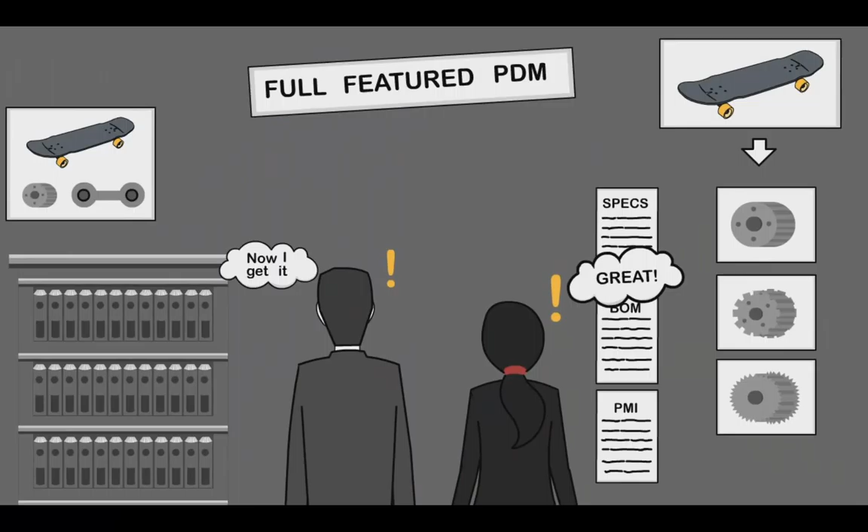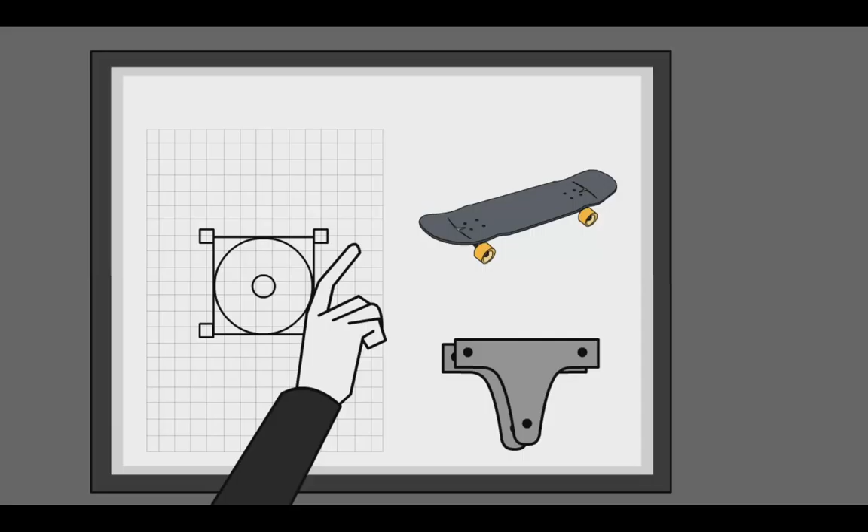PLM is very good at managing data and processes, but it's just out of reach for a lot of manufacturers, at least as a first step to get data under control. Let's take another look at full-featured PDM. PDM helps companies keep revisions and configurations under control and prevents overwriting files.

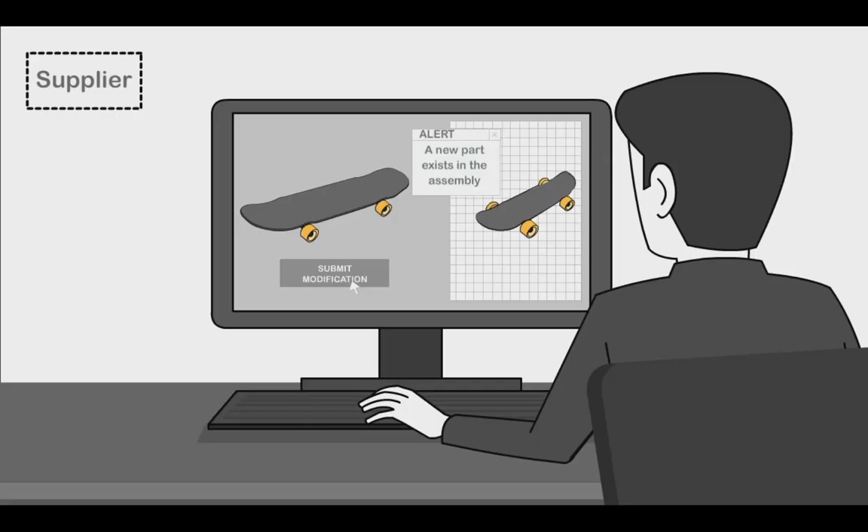It helps engineers work better, even if they're in different locations. And it helps designers coordinate activities across departments and the supply chain, even if they use different CAD tools. Full-featured PDM provides the capabilities manufacturers need to control, access, and share product data in a way that's accessible to smaller companies. And PDM provides a valuable foundation that opens the door to more advanced PLM capabilities that provide even greater benefit.

As you saw in the movie, there are various options to consider, each with implications which may prevent you from realizing the full benefits quickly. That's where pre-configured PDM comes in to take away the guesswork so you can start quickly and achieve the benefits rapidly. Implementing PDM software without significant modifications helps companies achieve benefits more rapidly, get up to speed quickly, and then grow from there to gain further benefits.

With Teamcenter Rapid Start, you get essential PDM capabilities to control data and processes with a single source of product data, simple process execution, and multi-CAD design management. Teamcenter Rapid Start simplifies the installation process with pre-configured workflows and objects, along with your choice of CAD integrations. Your Teamcenter Rapid Start implementation includes one MCAD integration of your choice, and you can add on additional MCAD and ECAD integrations.

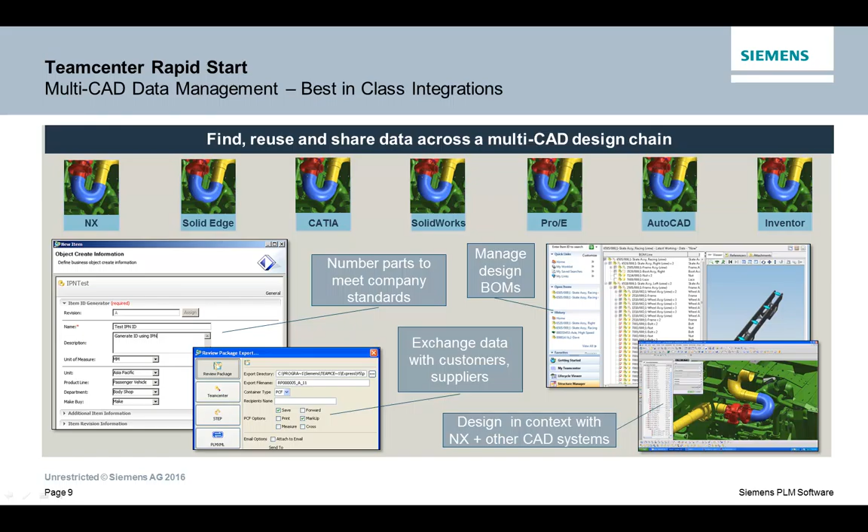In this short movie I'm going to play you, you'll see Teamcenter Rapid Start easily dealing with data from multiple CAD systems. Whether you require data management of a single CAD format or data from multiple CAD systems, Teamcenter provides a single source for all CAD data with integrations for NX, CATIA, PTC's Creo, Solid Edge, SolidWorks, Inventor, AutoCAD and other systems.

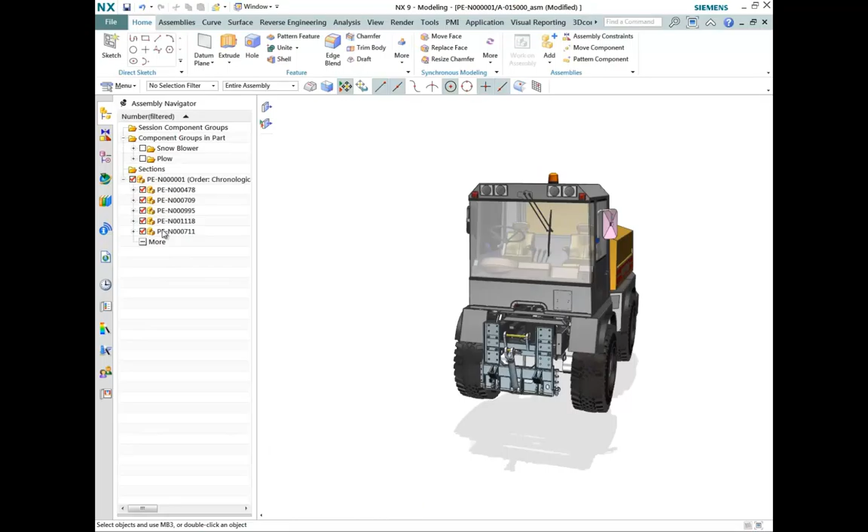You can empower designers to spend their time on designing rather than tracking down the files they need and having to convert the data. They can simply continue to work in their native CAD system with Teamcenter managing data and processes behind the scenes.

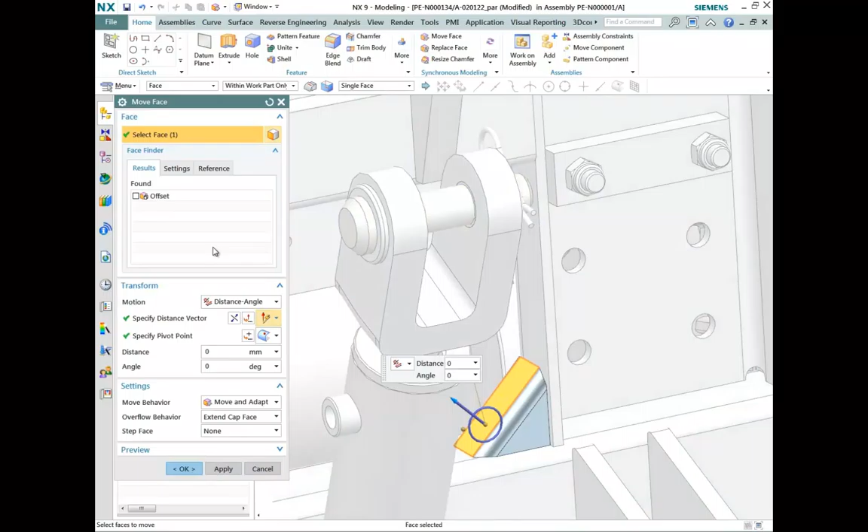Designers can easily locate a part or assembly, embracing reuse and ensuring they are working on the latest design at all times.

Once located, data can be opened and edited in a native CAD tool. In the example here, the designer is making a simple change to a snowblower subassembly. When the changes are complete, the item is saved in Teamcenter using version and revision rules, which can be configured to match your business processes.

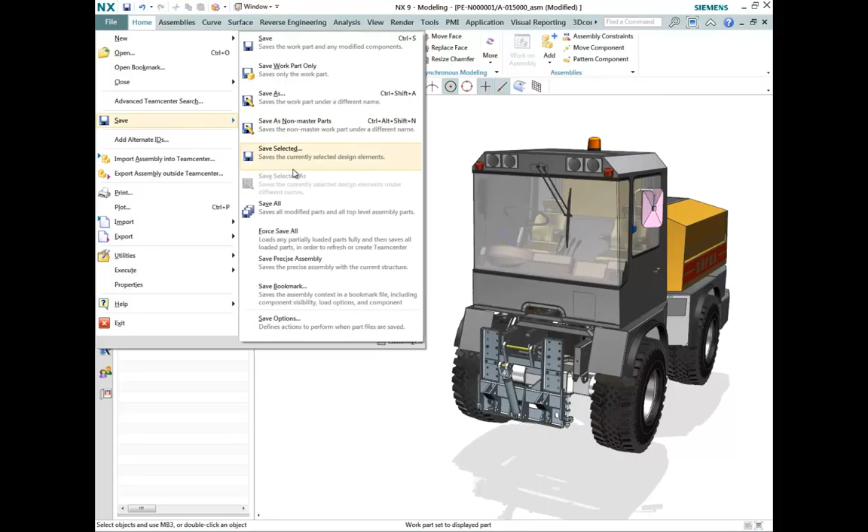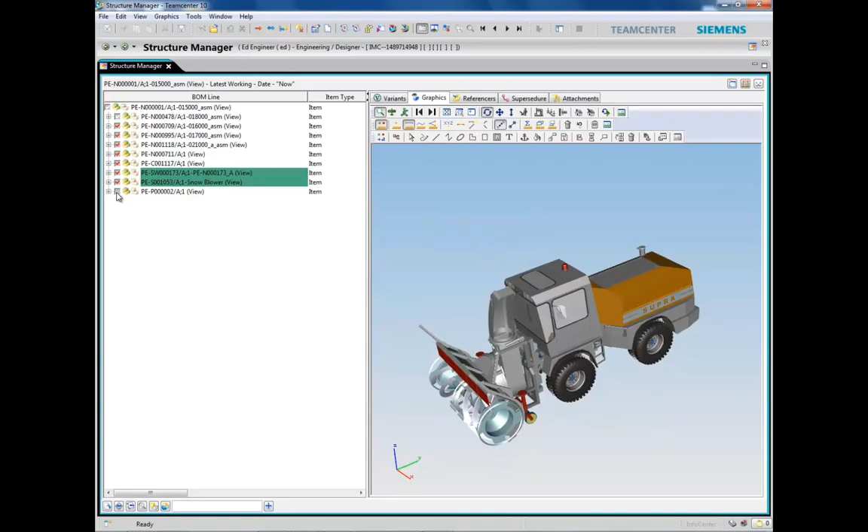You'll see here JT files, which are an ISO and industry standard CAD neutral format, are automatically created during the check-in to Teamcenter. And here inside Teamcenter we're looking at those JT files. They can be easily used to communicate, collaborate and share information both internally and externally with partners or suppliers.

In the example here we can now see the designer was actually working on a subassembly of a large snowblower, and users can browse through the bill of material of the snowblower there on the left, loading either the entire product or just some simple components they're interested in.

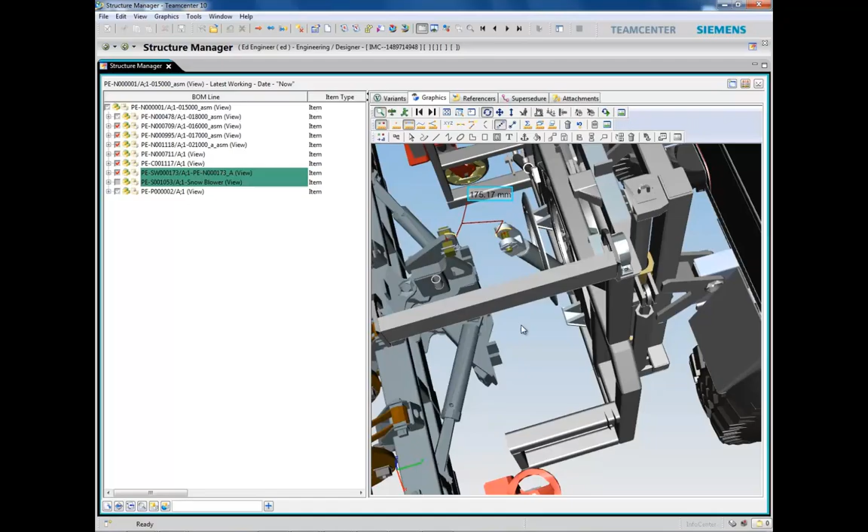Participants in the PLM lifecycle of these components and assemblies, who can be widely dispersed, can use the data and reviews to make measurements, analysis and markups. You don't need to be a designer or a user of a CAD system to be able to do this.

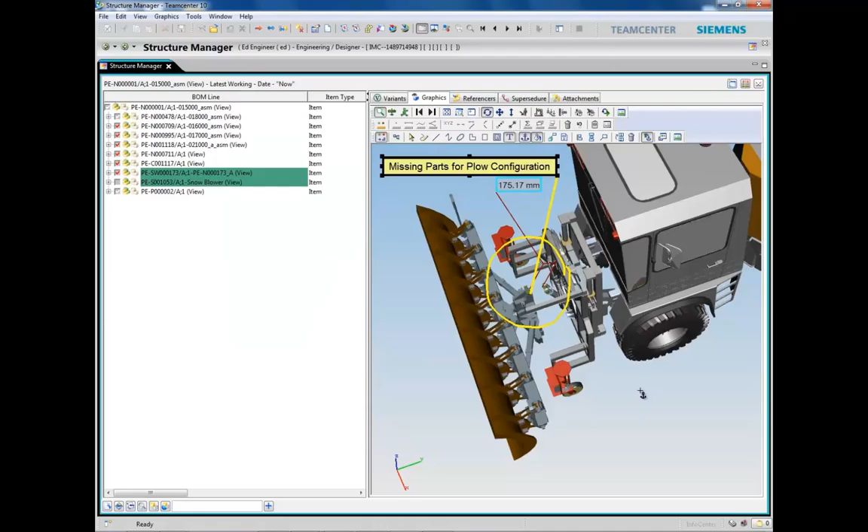So you'll find from basic markups to more advanced analysis, Teamcenter Rapid Start provides very robust digital mockup and validation capabilities. Here we have a report to visually highlight the native CAD system for each subassembly.

These same types of colour reports can be used to show the release status or the supplier that did the components, or the effectivity dates and many other attributes which you're recording. Flexible reporting capabilities will allow you to easily understand and communicate important information in an accurate way.

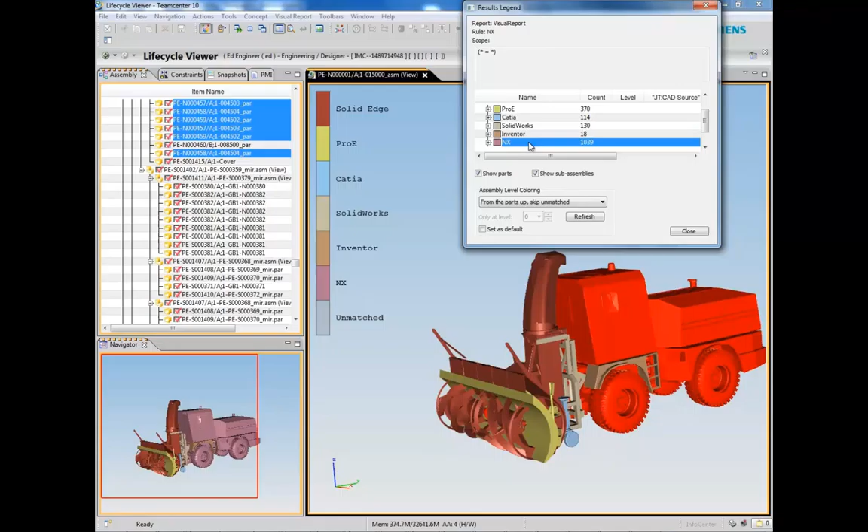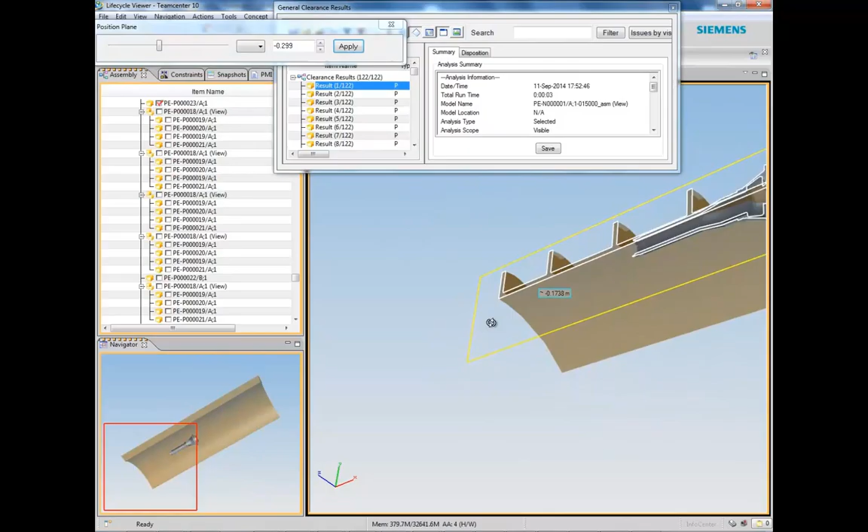With capabilities such as process simulation, path planning, clearance analysis, you can support accurate analysis across the whole life cycle. And in the example you're seeing here on the screen, we're performing a clearance analysis of components which are close to the blade. You can step through each of the issues which have been identified to perform further analysis and check whether that actually is a problem for you.

And these are just a few of the capabilities provided with Teamcenter Rapid Start.

Moving on from the multi-CAD capabilities we've just seen, we will take a closer look at the Solid Edge integration. As I mentioned earlier, there are integrations to all the major CAD systems, but due to time constraints I won't be going through them all today.

Here, the Teamcenter integration to Solid Edge enables you to reduce product development cycles and costs by seamlessly connecting Solid Edge with synchronous technology to Teamcenter Rapid Start. You can capture Solid Edge data for reuse in future projects without placing an additional burden on the CAD user.

The integration enables design information created in Solid Edge to be captured, controlled and shared in a single highly secure PDM environment. Version management and access control capabilities ensure that the right people in your enterprise get the right information at the right time. Design teams can quickly find, access and reuse parts and 3D assemblies, thus saving time which is wasted trying to find and share design information.

The management of part and assembly relationships information, as well as the mapping of attributes, enables the definition of the overall product structure and validation of design components across multiple product configurations.

From this assembly data, designers can filter through and establish the proper spatial context in a global design environment by quickly navigating large amounts of product and process information, regardless of what tool the information came from or the sources of the data, a partner or supplier or engineers from another site, for example, and work only relevant data while retaining the context of the total product, which reduces the need for extensive change orders by ensuring that everyone is working from the latest design information and the product context that they require.

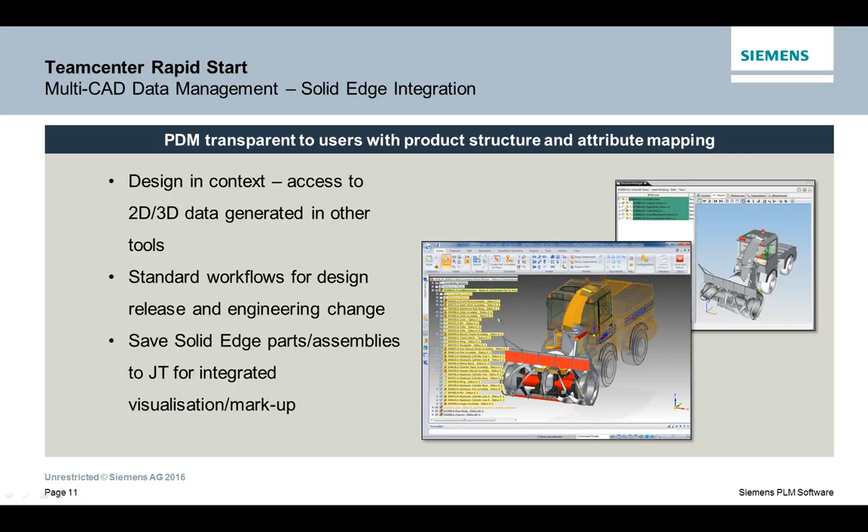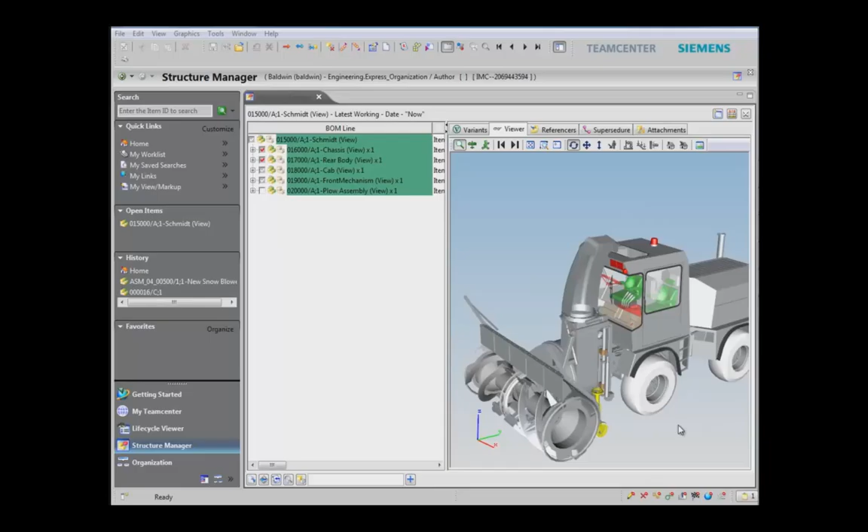In this movie we can see the Solid Edge integration for Teamcenter Rapid Start in operation. The integration creates and manages product structures and bills of materials inside Teamcenter Rapid Start, and using configuration rules, it allows you to see that assembly as it was saved, or only showing released parts which were approved for production, or you could configure it to see parts which are work in progress and not yet released to production.

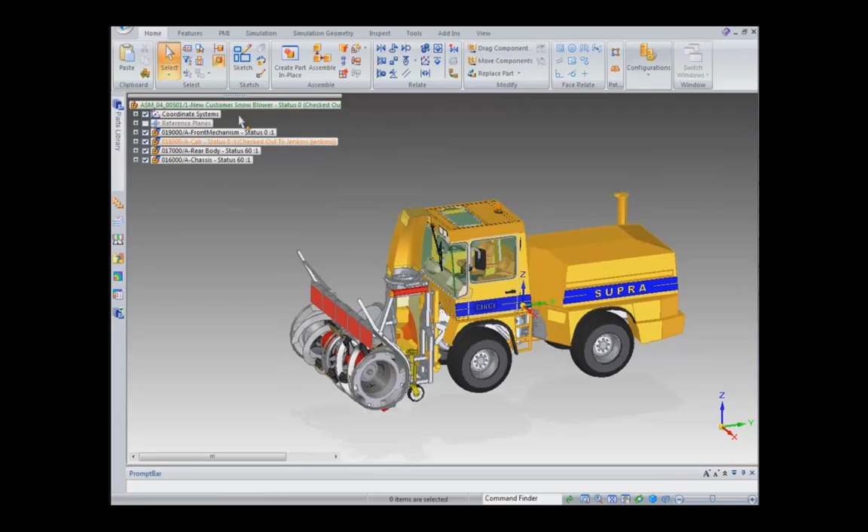What we're seeing now is the relevant assembly opened up inside Solid Edge, and you can see there's information in the tree showing us various properties and attributes such as the item name or item ID, and status, like it's checked out by somebody else or it's read-only because it's released. Having this data available inside the CAD system increases design efficiency and eliminates the need for rework because mistakes have been made.

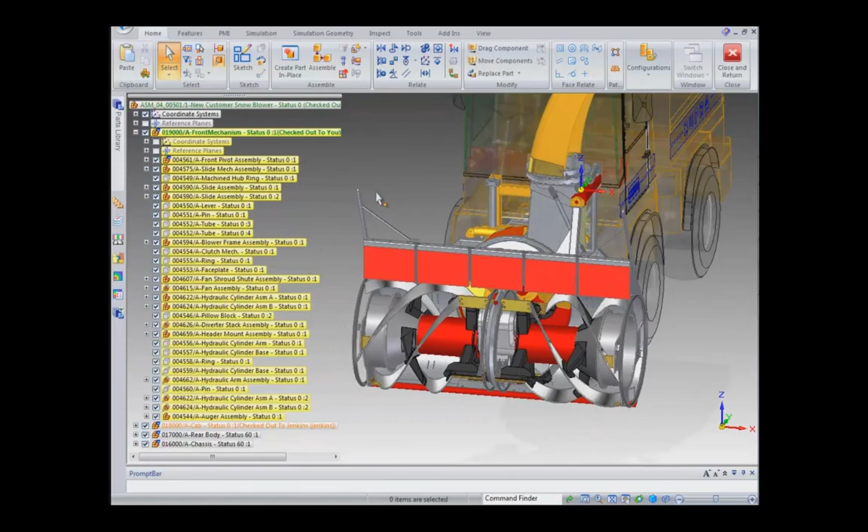What we're going to see is the user making a change on just a single component. So what he's doing is turning off the background data to focus on the part which requires the change. This is the part that's going to be changed, and what we can see there is a warning that this part is actually released, so it is read-only data, and to make the change we'll have to save this as a new revision.

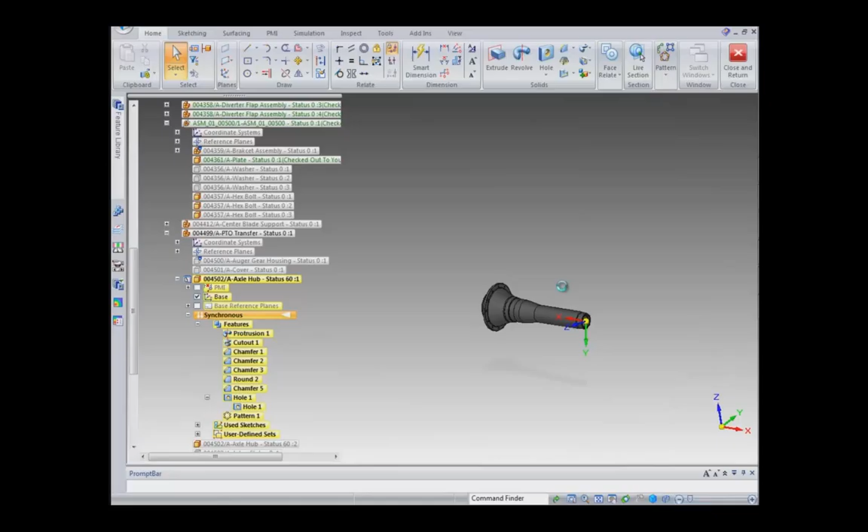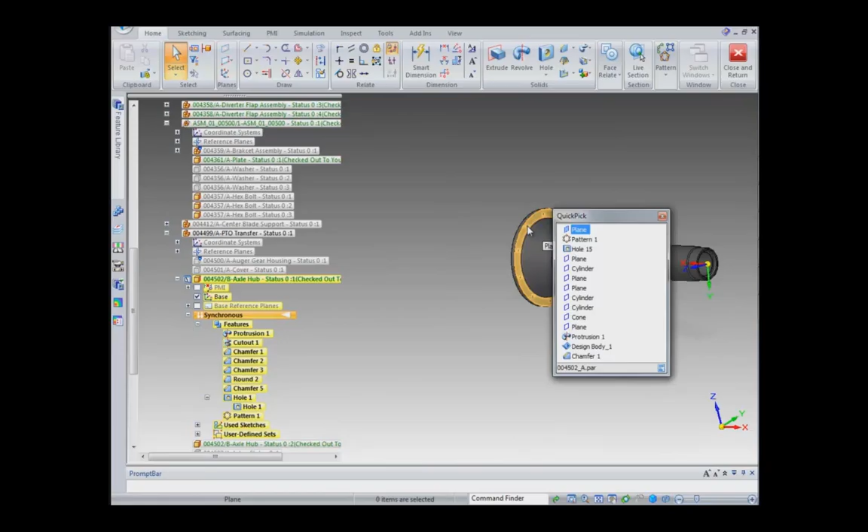Using Solid Edge's synchronous technology and the QuickPick menu, we're going to make some changes to the number of holes and also the size of the holes. And when the changes are saved back to Teamcenter, it will update the product structure information inside Teamcenter Rapid Start.

As you've seen, using Teamcenter Rapid Start helps accelerate design cycles by helping find and reuse data, as well as improve product quality and reduce cost, by ensuring you are working on the correct version of the design and not incorporating changes which will negatively impact manufacturing or product quality.

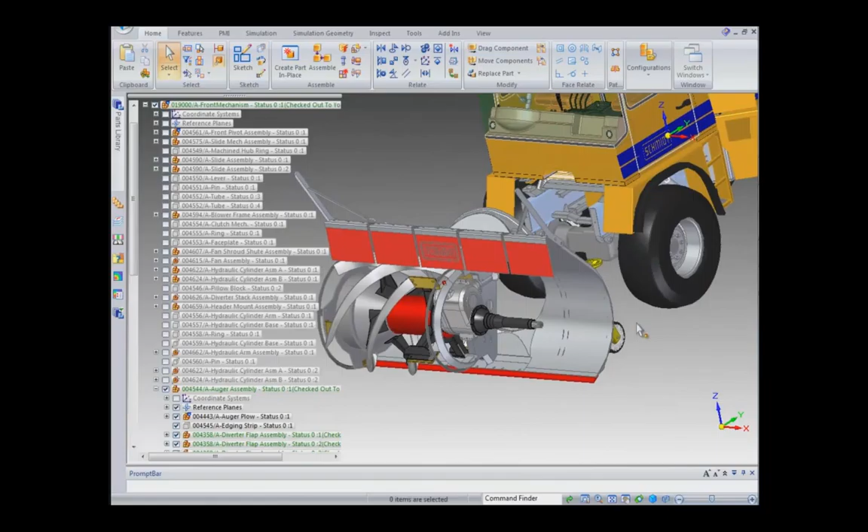Teamcenter Rapid Start uses the standard Teamcenter integration for SolidWorks, which allows you to reduce product development cycle times and cost by enhancing your SolidWorks environment to deliver a single source of product data for your design and manufacturing teams. The integration provides access to a full range of PDM capabilities to help ensure that the right people get the right information at the right time.

To help maximize designer productivity, the integration enables designers to create, save, search and edit SolidWorks objects, including drawings, parts and assemblies. Users can selectively update in-session models to later versions or revisions without reloading their entire assembly. During the design process, the Rapid Start environment tracks and manages the creation of new product revisions or version updates for work in progress. As a result, designers spend less time finding the correct revisions of SolidWorks data.

To further improve designer productivity, the Rapid Start integration supports the bidirectional transfer and synchronization of model properties that are leveraged when establishing the product structure, as well as the bidirectional cross-highlighting between the SolidWorks tree and the Teamcenter tree. This allows you to easily identify the corresponding model in the other tree view regardless of your starting point. This bidirectional management of the model's relationship information, as well as the mapping of attributes, enables the definition of the overall product structure and validation of design components across multiple product configurations.

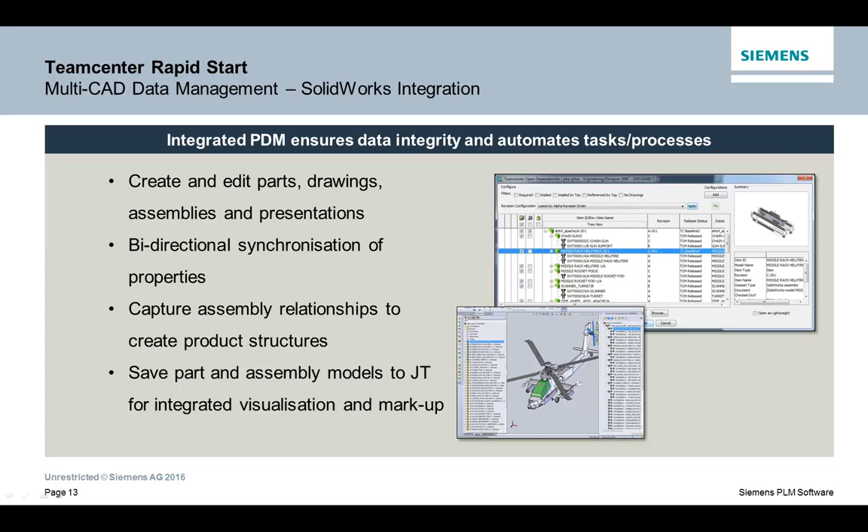Now we're going to look at the Teamcenter Rapid Start integration for Inventor. The integration for Inventor enables design information created in Inventor to be captured, controlled and shared in a secure environment, with version management and access controls to ensure access to the right information at the right time.

The user interface is a graphical browser-based system which presents a familiar and easy-to-use method to save, locate and retrieve the required data. The Teamcenter home browser is available directly inside of Inventor to facilitate ease of use. Design teams can quickly search and access parts, assemblies and drawings, which eliminates time wasted trying to find these parts.

Designers can bulk load entire folders of Inventor parts automatically in Teamcenter to facilitate an easy deployment, and it also enables your organization to eliminate unnecessary change orders by ensuring that everyone is working from the latest design information. The integration supports bidirectional ownership of properties between Teamcenter and Inventor. The ability to clone Inventor assemblies, parts and drawings for design reuse and experimentation, as well as place and rename components in an Inventor assembly and automatically transfer product structure and part drawing links directly into Teamcenter, helps improve designer productivity.

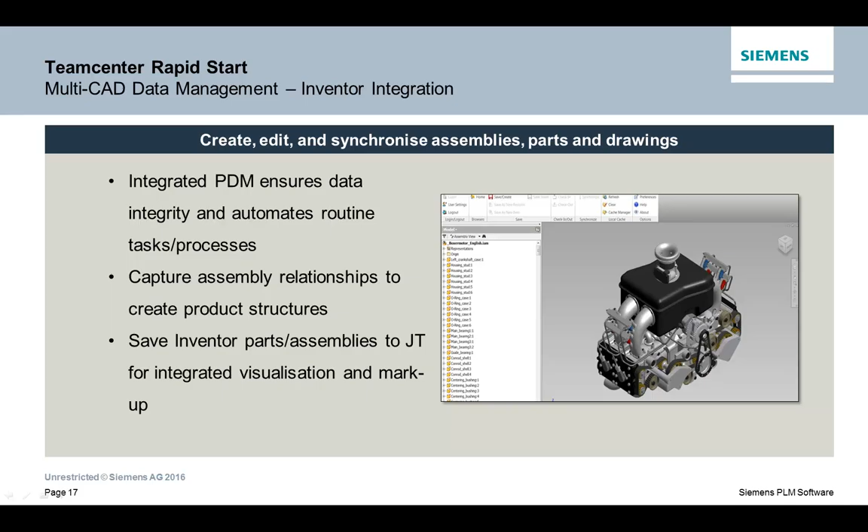Teamcenter Rapid Start includes the powerful Product Structure Manager module that enables customers to manipulate product structures that have been automatically extracted from a CAD system and that have been manually configured. The management of part and assembly structures and relationships, as well as the mapping of attributes, enables the definition of the overall product structure and validation of design components across multiple product configurations.

Defining a product structure or bill of material early in the engineering process allows downstream users to access and extend a common BOM and avoids many of the misunderstandings typical in companies with multiple bills of materials. It also helps streamline reuse and promotes rapid prototyping, allowing you to respond to market opportunities faster.

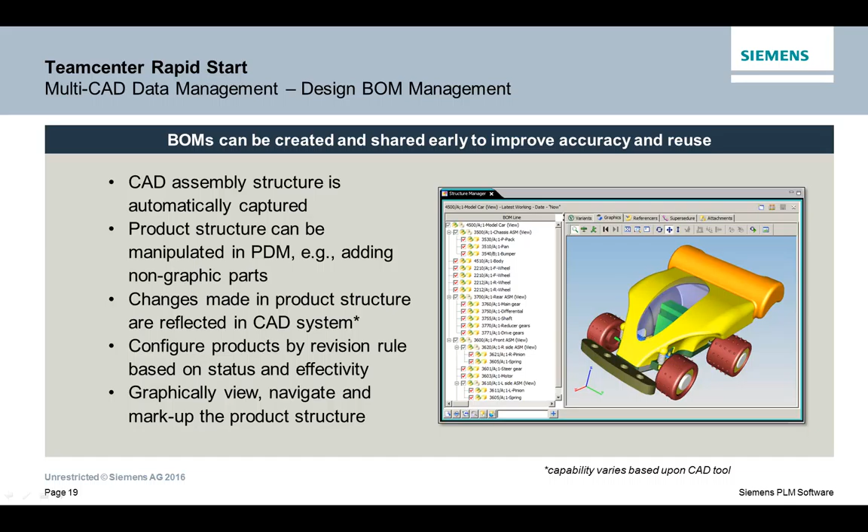Teamcenter Rapid Start's data exchange capabilities enable users to create a design review package containing 2D and 3D CAD files and other technical documents and send this package for review and markup by external users. This builds on the established use of email as a de facto method of exchanging data within mid-market supply chains. It further enables efficient design reviews with other work groups, suppliers and customers, and is open to all CAD formats and all document types available within Teamcenter Rapid Start.

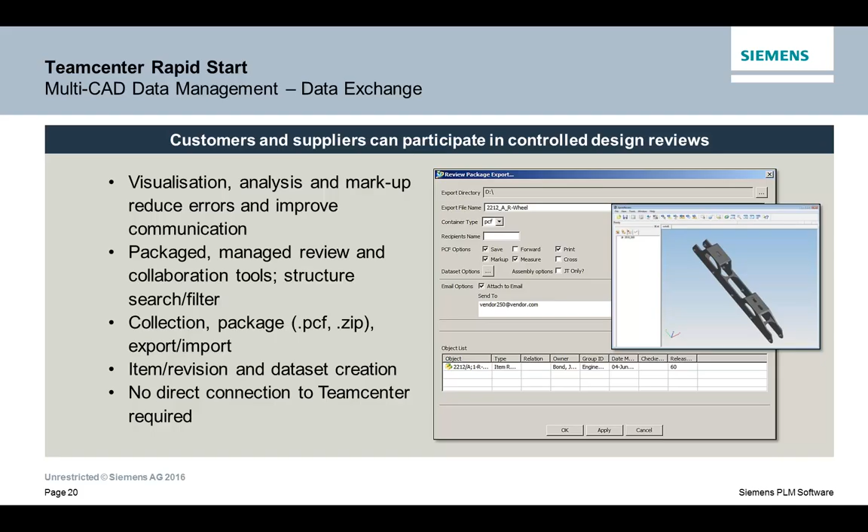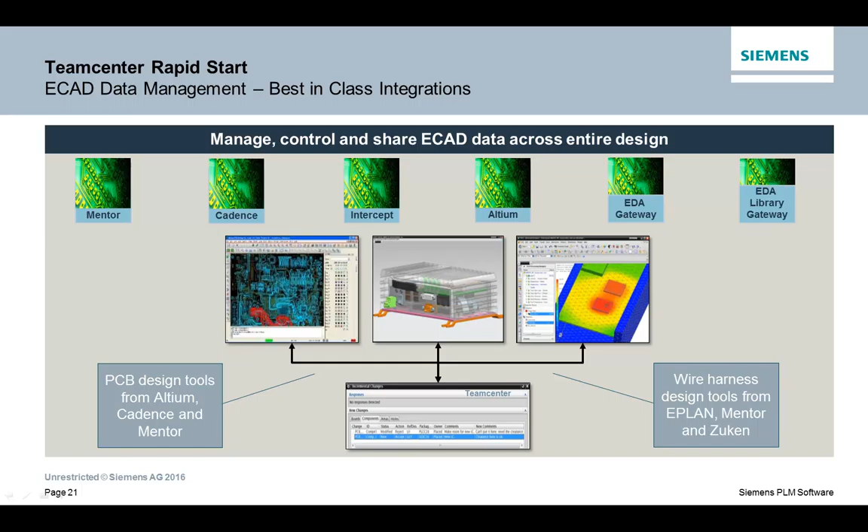Now Teamcenter Rapid Start customers can collaborate closely within and across domains and organisational functions, working with both mechanical and electronic design data in the same pre-configured PDM environment. Integrations are available for many of the common systems from Altium, Cadence, Mentor, Zuken and EPLAN, for example. For other ECAD systems we can use the generic gateway to capture the design data.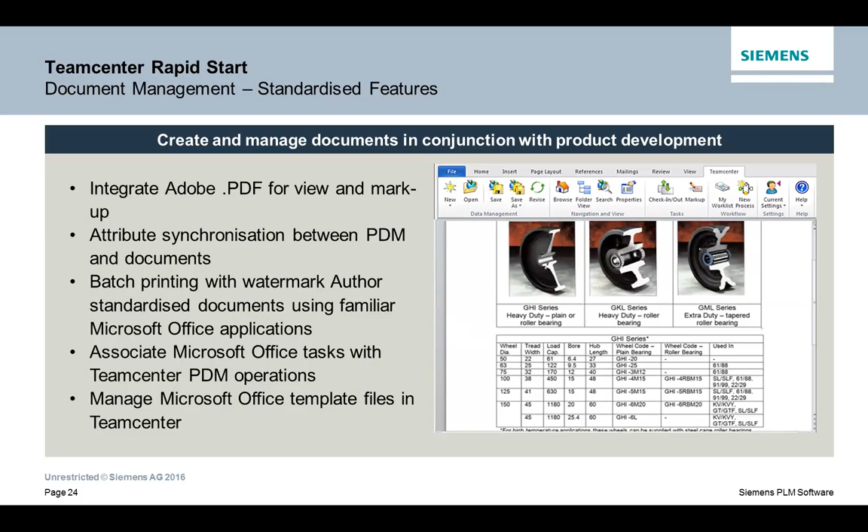Now let's talk specifically about the document management functionality in Teamcenter Rapid Start. Teamcenter Rapid Start includes standardized document management features so you can create and manage documents in conjunction with PDM processes and data. Related documents are associated with products, and you can synchronize the attributes between documents and PDM. Adobe PDF integration gives you viewer markup tools, and you can create structured documentation and do batch printing and watermarking.

Teamcenter Rapid Start delivers a standard integration with Microsoft Office to extend the scope and coverage to the desktops of numerous professionals and users inside the engineering department. This includes the managed creation and update of technical publications, process sheets, customer requirements, manufacturing setups, test specifications, and other document management applications. In this scenario, the user interacts with product information and processes directly through the familiar Microsoft Office user interface.

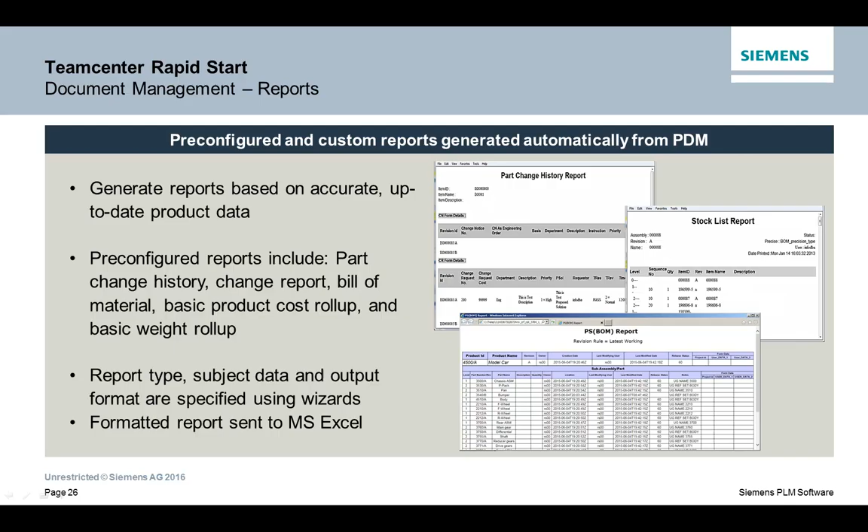Teamcenter Rapid Start comes with pre-configured reports to support your everyday requirements. These include cost and weight roll-up, bill of materials, and change reports. A wizard is used to select the type of report that you want to generate, the data that you want in it and the output format, and then you can go ahead and create further reports if you want additional ones to the pre-configured ones.

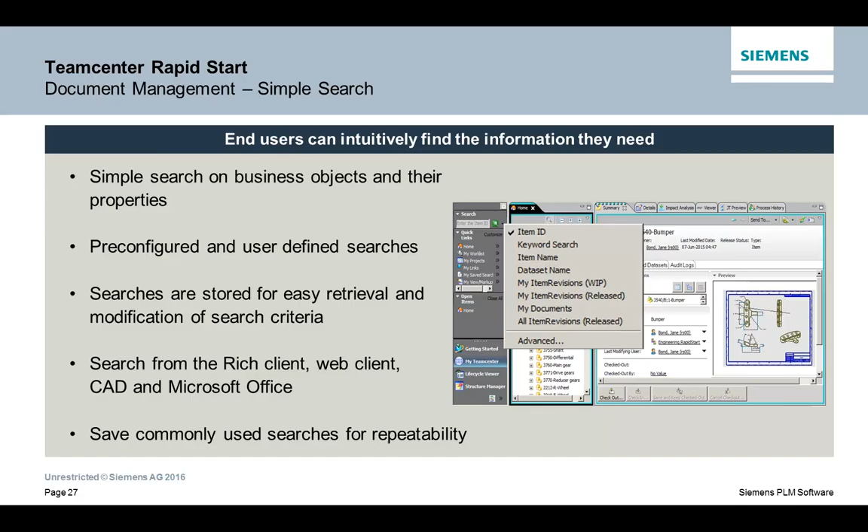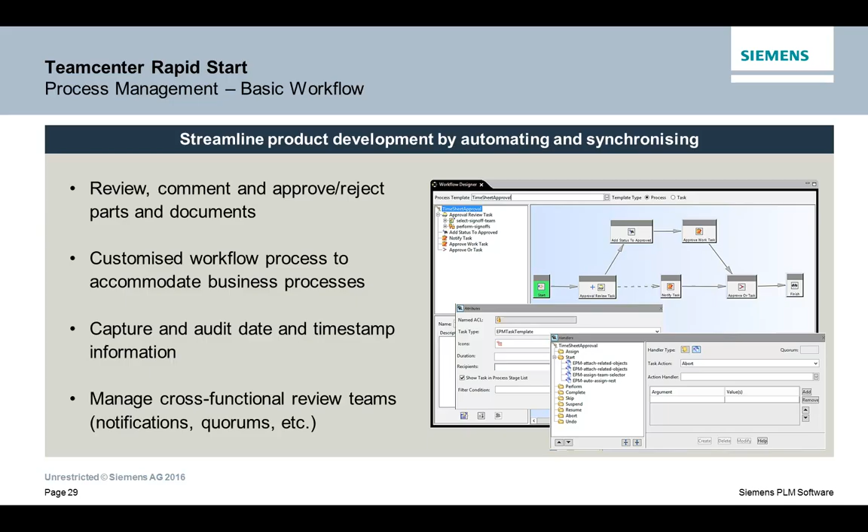So now let's look at how the data can be applied to common processes to support your business. Teamcenter Rapid Start provides you with basic workflow capabilities to streamline product development by automating and synchronizing processes. You can submit items to a workflow and have participants comment, review, approve or reject the items. There are pre-configured workflows for releasing items, handling change and more. And the workflows create an audit trail including the details of the user and the time when things were actioned, and this can be helpful for reporting later on.

Generally, after an item's gone through a workflow, it is given a new status. Teamcenter Rapid Start comes pre-configured with 3 statuses, although you can add more if you wish. These are development release, production release and obsolete. From our experience of performing many deployments, we find that these are the most commonly used statuses. However, you are free to add others and change the workflow processes without the need for any programming.

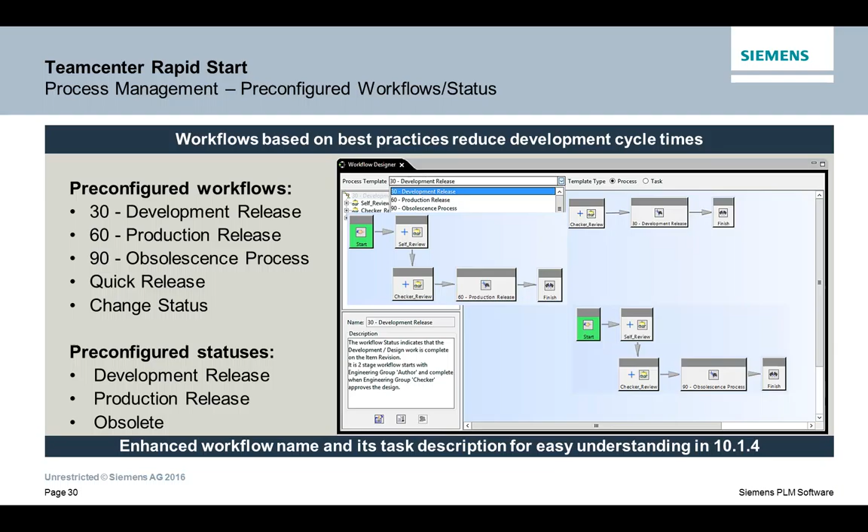Workflow processes are fully integrated with the Microsoft Office suite of products. It's possible to both initiate workflows and sign off your approval from within the Microsoft Office products, and you can also capture emails within Teamcenter for future reference if they contain important information.

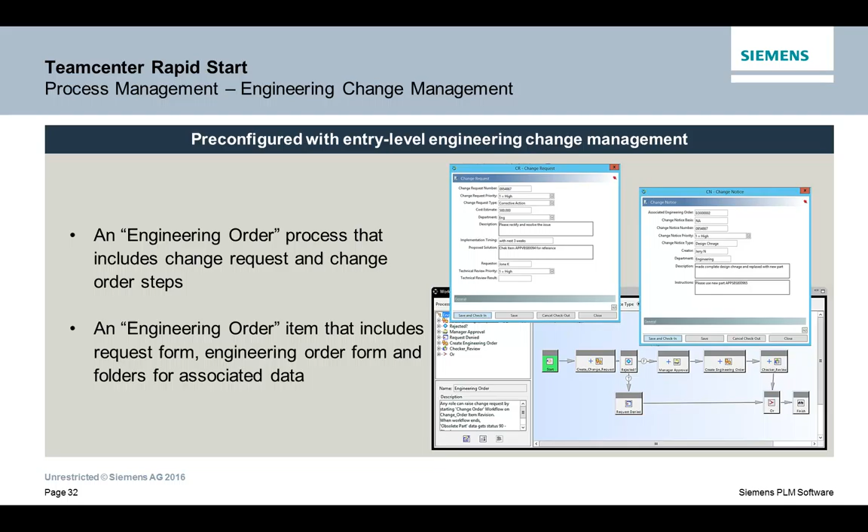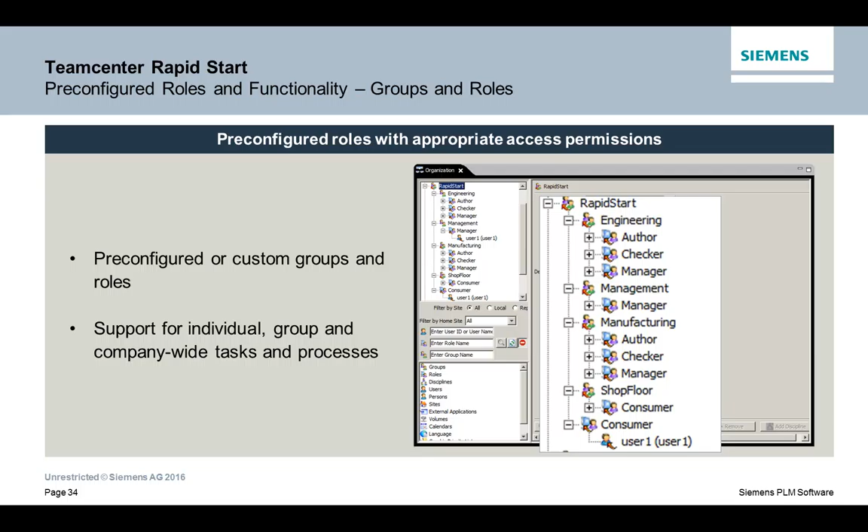Now we'll look at the pre-configured organisational structure within Teamcenter Rapid Start. Within Rapid Start, a typical organisational structure has been created with departments and job roles. All that you need to do during the deployment is add the names of your users into the correct areas, and then these are automatically picked up by the workflows when selecting people for sign-off, and it's also used for setting access rights to data.

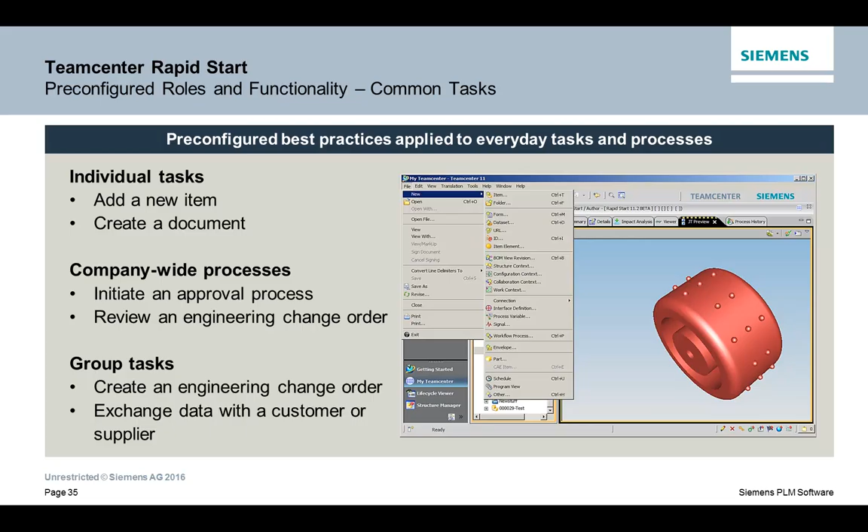The standard set of roles support the tasks we do every day, both as individuals and together. For example, you want to start a new project or issue an engineering change order or review a design. Then these tasks are easily started using a number of shortcut links in a special menu area of the user interface. And these tasks are automated by Teamcenter Rapid Start wizards to make them repeatable and efficient processes.

Here's another very useful feature. The shop floor viewer client is a simplified web client that is targeted at shop floor use cases such as view, measure and print. It's only able to locate data which is approved for manufacture, and so avoids the possibility of parts being manufactured to drawings and models which are still in development. The pre-configured shop floor viewer is deployed automatically on initial selection during the installation process.

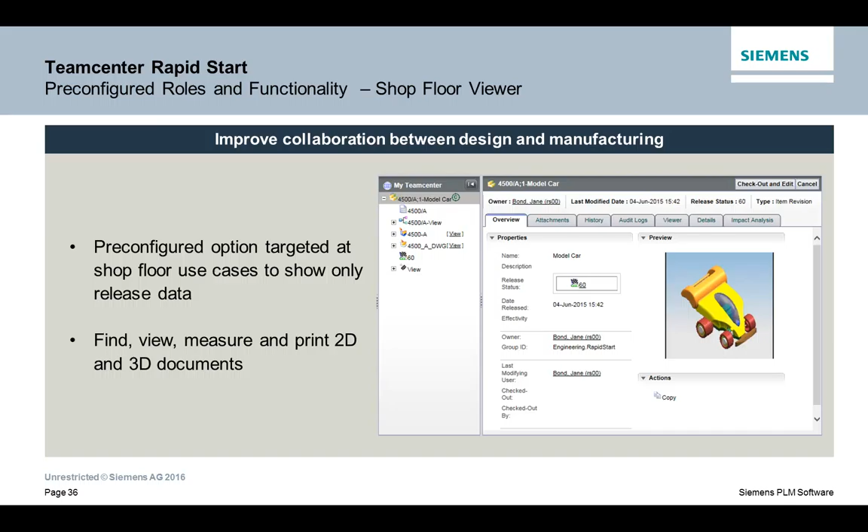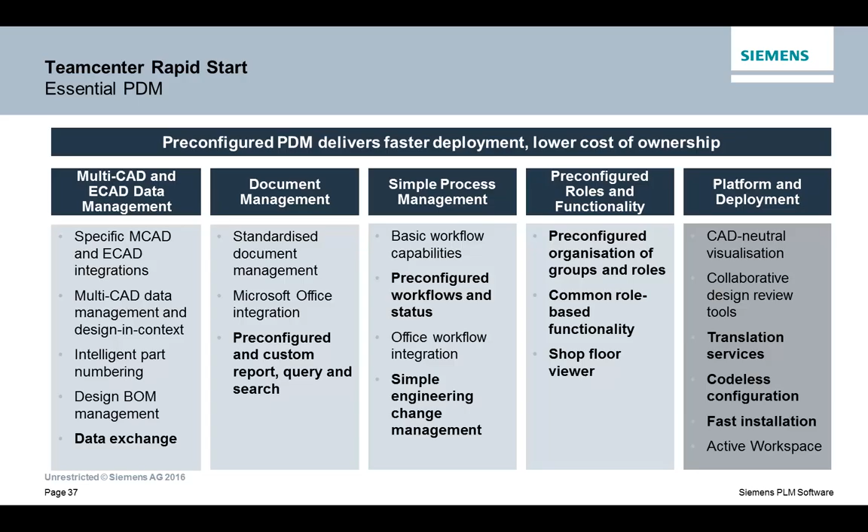So in this final area now, we're going to look at the underlying functionality of the platform that supports all of these tools and capabilities. All the PDM functionality of Teamcenter Rapid Start takes advantage of Teamcenter's best-in-class visualization. We've seen it earlier on during this presentation.

Teamcenter delivers visualization, collaboration and design review using the JT file format and a large number of other 2D and 3D file formats. Organisations that work in a multi-CAD environment can perform analysis on multi-CAD 3D assemblies without requiring access to the CAD system, and this capability is extended to the web for users without an engineering workstation, such as sales or purchasing, for example.

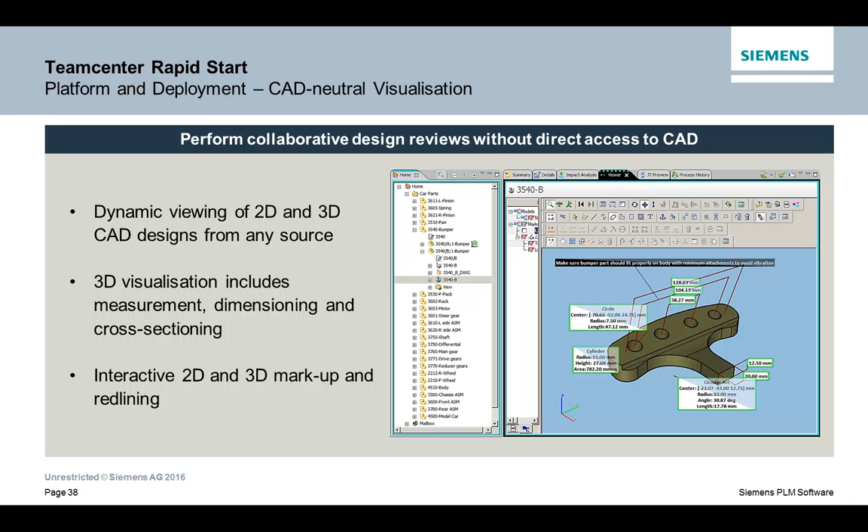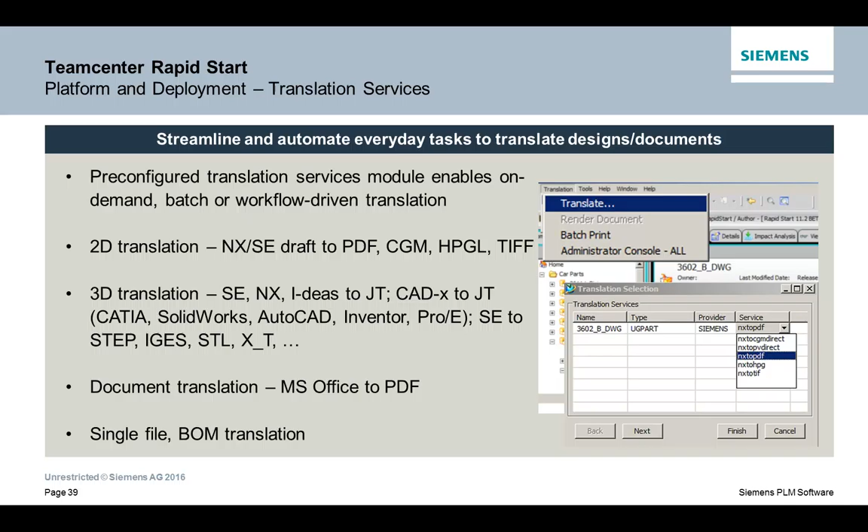Teamcenter Rapid Start also comes with pre-configured translation services to automate the conversion of both 2D and 3D file formats to neutral formats, and this can be done on demand against a single file or an entire bill of material, and alternatively it can be handled in a batch process or integrated into a workflow process, so after gaining approval the neutral formats get automatically created, for example.